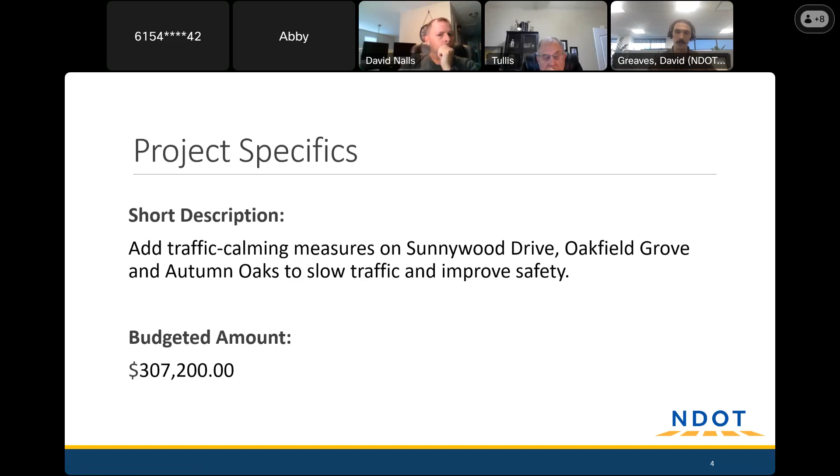Yeah, that is a good question. So basically what I'm aware of is what's available on the public end of the process - there's a short description and a longer description on the website. But I don't really have a lot of history on what decisions were made leading up to how those descriptions came through on the ballot.

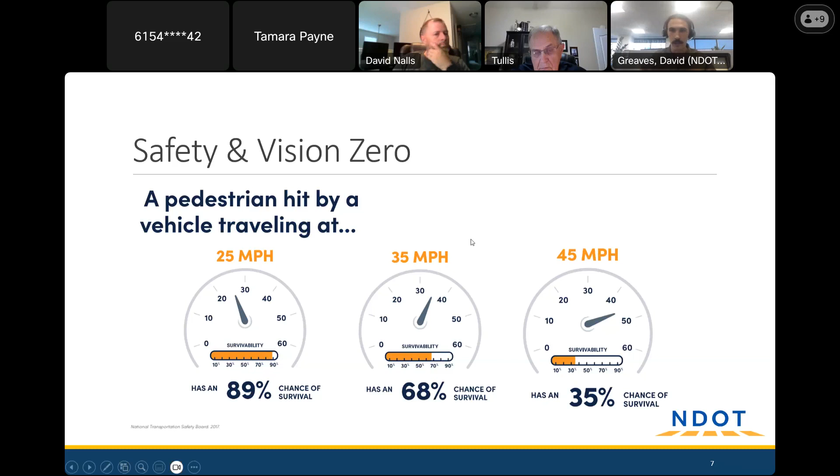So this graphic here demonstrates that at the 25-mile-an-hour range, where most of our neighborhood speed limits are, if somebody is struck, they've got a pretty good chance of making it out alive. But as those speeds climb to the 35 and even 45-mile-an-hour range, those accidents become much more serious and have a much higher probability of killing the person. So that's what we're seeing and why we're so concerned about speeding in neighborhoods.

As just a bit of background to traffic calming, I'm sure some of you are familiar with Hub Nashville. This is going to be a good resource to be aware of in case we come across anything y'all would like to request that can't be fit into a project like this. Some examples would be sidewalks, stop signs, debris in the road, potholes, that sort of thing. It's a good way to contact Metro for just about anything. That can be reached at 311, hub.nashville.gov, or they also have an app that makes it pretty easy to file requests and post photos and such.

So before we jump into specific designs, we're going to review all of the tools in Nashville's traffic calming toolkit. Some will work well for some streets and not well for others. We'll get into that when we present the concepts, but I'll just jump into some of the options we have on our plate.

The first one is speed cushions. These are modular rubber devices that act kind of like speed bumps, but they're stretched way out in the direction of travel so that they don't have quite as much impact as a speed bump might have. Speed bumps are really short, maybe a foot long, intended to encourage driving at 5 to 10 miles an hour. These are stretched way out to encourage driving between 20 and 25 miles an hour. There are different lengths for different scenarios and different levels of traffic — that's a design decision we'll make a little further down the road.

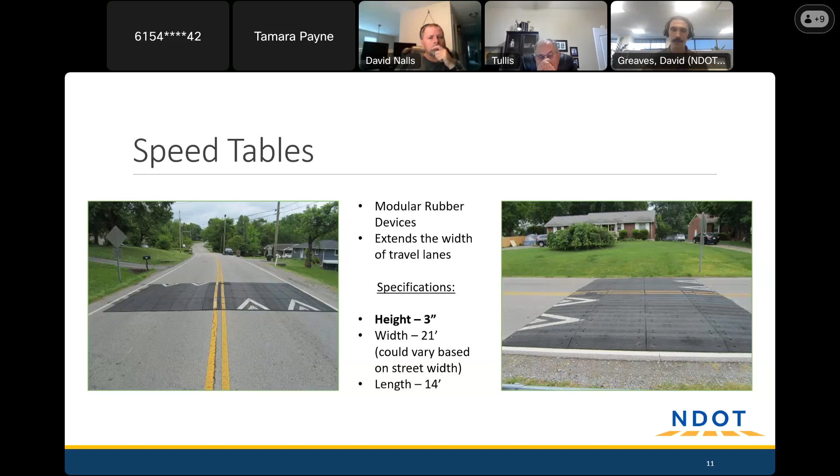They're distinct from speed tables, which stretch all the way across the road but are otherwise the same thing, because speed cushions have gaps in between them. Those gaps allow emergency vehicles with wider wheelbases to navigate these without having to slow down quite as much as a smaller vehicle, like a truck or a sedan, might. So that's the difference between the two. We tend not to use speed tables too much, particularly on roads where we'd expect emergency vehicles to need access to get to other parts of town, but we'll cover that if necessary. They can be good for odd road widths where we may not be able to get a solid speed cushion design in.

Those two combined, the vertical measures, are definitely NDOT's preferred method for slowing speeds. The reason for that is we know they're a good investment. NDOT has done a study of a few projects before and after installation and discovered that the speed reduction they were shooting for was achieved.

Where we can't do speed cushions or where maybe a little extra help is needed, we can think about radar feedback signs. It's basically a solar powered device that you pair with a speed limit sign to flash back the speed you're going as you approach it. It's got radar to show you that number, but it doesn't take any pictures or write any tickets. It's really just intended to be more of a reminder—if you weren't intending to speed, maybe seeing that you're going over the limit will slow you down.

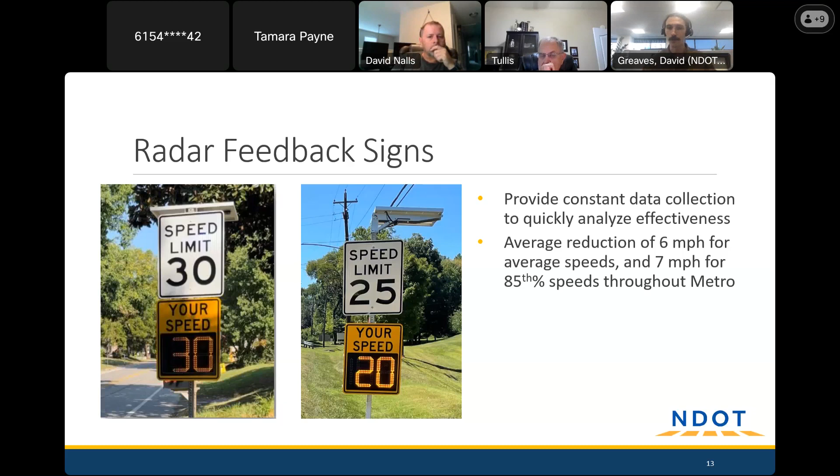On roads that are a little wider than they need to be, we sometimes find it effective to narrow the road with edge lines. This is intended to make the road a little more claustrophobic. We'll still give two solid lanes worth of pavement, but we don't want so much extra width that people feel comfortable going faster than they should. It's like driving on the interstate with very little traffic—it's wide open and easy to lay on the gas more. But in a cramped, tight environment, we drive much more slowly because of the additional maneuvering needed.

A side benefit is it can make it a little more comfortable to walk on the edge of the road if you're a pedestrian, because you've got a line you're staying on one side of, and you can expect vehicles for the most part to stay on the other side. It certainly doesn't mean don't watch out, but delineating that space can be an improvement for walkability.

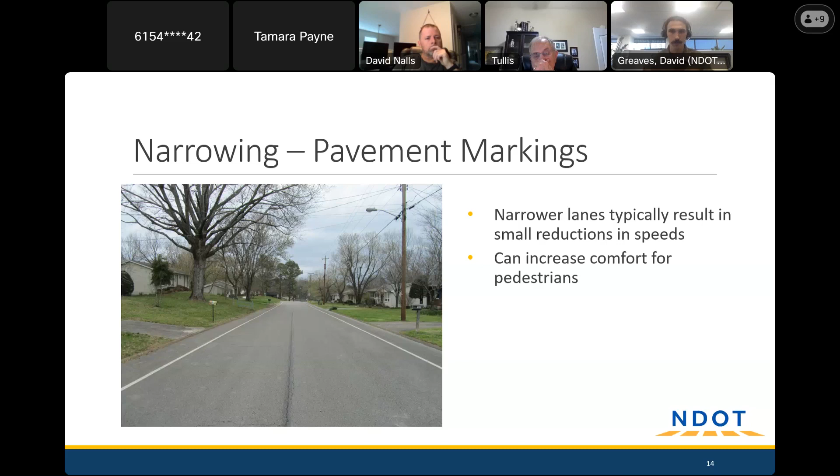On really large intersections, we narrow them from both sides. This works the same way as narrowing does, reducing the space we have to drive in to beget slower speeds, but they're a little more complicated. Essentially, we tighten the turning radius at those corners, making it necessary to slow down and make turns at a safe speed. If we had really wide radii, like you may see on an interstate ramp, it's a lot easier to take those turns going fast, which may not give you enough time to notice a pedestrian in the road or someone crossing the street. So we like to put these in at intersections with a lot of pavement width, particularly ones where folks may be walking around.

We can also do chicanes. This is where we take a wide road, narrow it down, but then zigzag the center line back and forth. This slows speeds by both narrowing and forcing drivers to maneuver as they go along a roadway. The main disadvantage is if you have a road with two sides of on-street parking, it basically takes it down to one side alternating. So in neighborhoods that rely on street parking, we tend to be hesitant to go for this option. But in neighborhoods where parking isn't going to be a big deal, it can be a good tool.

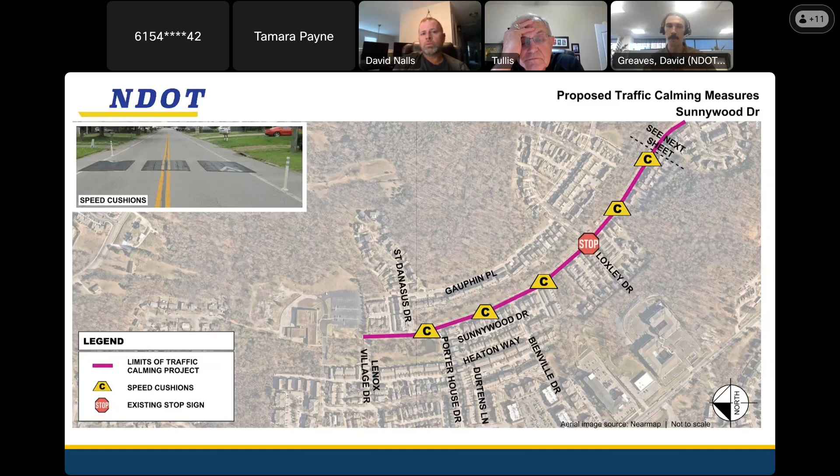Yeah, sure thing, that sounds great. I'll add a note about bulb-outs in particular, because we're going to talk about those with some other projects. Might I just add one point? Yeah, please. This is Jim Thompson.

Lot of people through there, which is really great. One disturbing thing to me is folks that come into that intersection, kind of slow down, particularly turning up Old Terrace. Lots of folks, it's a fast rolling turn, and I do worry about pedestrians, of which I'm one, with the traffic, kind of careless, sloppy driving. But there are lots of folks on foot. That's the point.

Got it. Well, yeah, that's good to know. So I guess I'll continue on to my note about the bulb outs. What these do, for the most part, is enforce existing parking laws. So if anyone isn't aware, nobody should be parking within 30 feet of a crosswalk. That's to make sure anyone using the crosswalk is visible before someone starts making a turn. So if we do put bulb outs in, no existing legal parking spaces will be impacted. But if people do tend to park at an unsafe distance to that crosswalk, this will help keep everything organized.

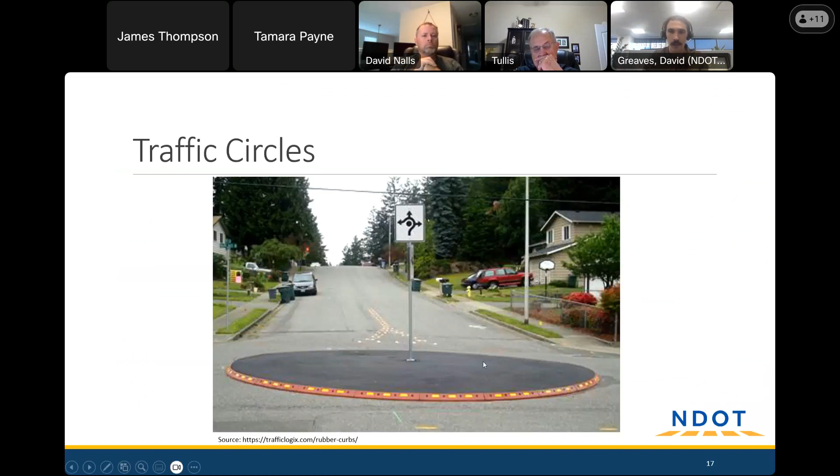So it sounds like we should take a look at that intersection in particular and see if there's anything we can do to improve the safety. Something like this might be helpful, but we're going to go out and do a site visit, collect a lot of data in person, and make sure everything we're seeing online in imagery is generally correct. That's great. Thank you. And thank you, Jim.

Any other thoughts on Sunnywood? We can come back, but we've also got two more streets.

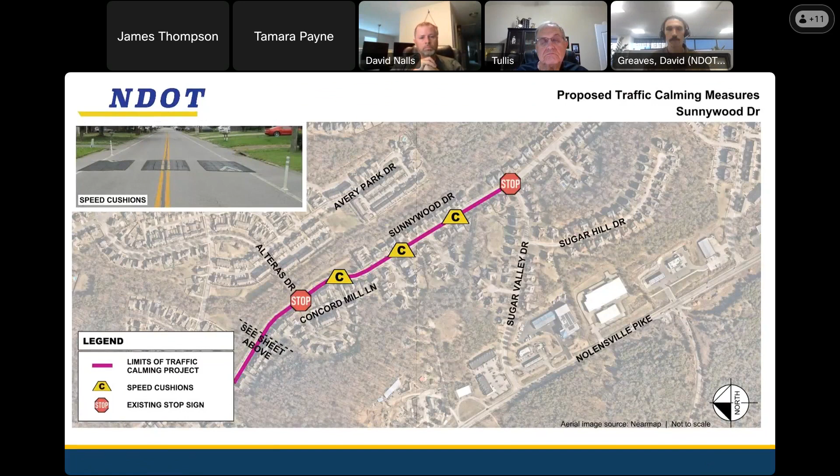Sure. All right, so on to Autumn Oaks. This one was a challenge to design because of grades. One thing I didn't mention with speed cushions is we do not put them on hills, because there is in one part a warranty that will go away if it's on a grade steeper than about 7%. It's also just kind of bad design practice to put these on curvy streets or anywhere visibility might be reduced. So I found the one flat section of Autumn Oaks, where this row of houses is shortly before Autumn Oaks Court. And then this intersection here, I noticed had a crosswalk that may not be as protected as we might want. So I noted some bulb outs here just to get us thinking, but I'd love to hear from you all if there's anything else you'd like to see.

Sure, to that crosswalk at Scarlet Ridge and Autumn Oaks Drive — a lot of times that crosswalk is unable to be utilized because of street parking as well. So we share a lot of the same street parking concerns, where people are parking on sidewalks. They've got enough cars in their driveway that it's blocking the sidewalks, as well as parking on crosswalks. And it's right there at the turn, so it's difficult to see around that vehicle if a dog comes out, if a kid runs out in front of the car, at that intersection of Scarlet Ridge and Autumn Oaks Drive.

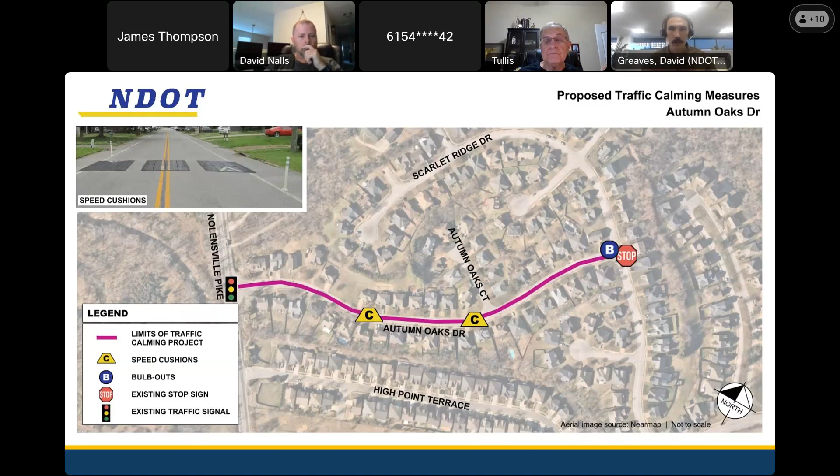So when will this be done? That's a great question. A typical traffic calming project tends to take a pretty long time, mainly because there are a lot of projects in the queue. So the estimate we normally give is 8 to 10 months from the time of design being done and going to construction, and then ultimately getting built. That isn't to say that's how long it takes to build it, so you won't be under construction for months at a time, but the queue is pretty long at the moment.

I will say it could be faster than that, because this is a participatory budget project. There may be a reason why it has to go a little sooner than a typical traffic calming project. But I can't say that for sure, I truly don't know if that'll be the case. But it'll either be getting to almost a year, or perhaps sooner than that if necessary.

So in circumstances like this one, where basically the traffic's already being funneled off of Nolensville Road through the neighborhood because of the road widening project, and basically nothing being done to prepare the community for this traffic, are there participating parties we can reach out to to try to expedite this, inside the community, since we now have a charter school we didn't have? We have 500 to 1,000 more cars a morning we didn't have because of the road widening project.

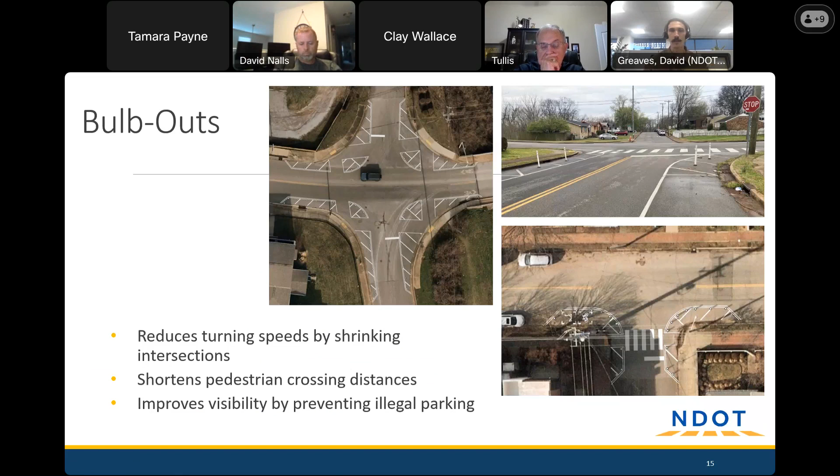The problem with Oakfield Grove is that the top of it, where it meets Autumn Crossing Way, becomes a racetrack. We've had literal drag racers come through, seeing how fast they can beat the car coming up to the two-way stop. We've sat in our driveway and had cars pass by so fast they're a literal blur on camera trying to record them. That's during normal times, like a Saturday afternoon. At 2:30 in the morning, I can be up with my youngest and they're still racing down Oakfield Grove.

My driveway butts up against Oakfield Way, so we're in a blind spot coming up from Indian Creek to where my driveway is. There have been multiple times I've been backing out of my driveway, checked it clear in all directions multiple times, and still almost been T-boned just trying to back out.

That's where, because people are just going excessively fast up through Oakfield Grove. They are flying, and it's not just everyday drivers, and it's not just kids. It is these modified vehicles that come through here sounding like gunshots most times, but it is the Chargers, the Challengers that think they own the road.

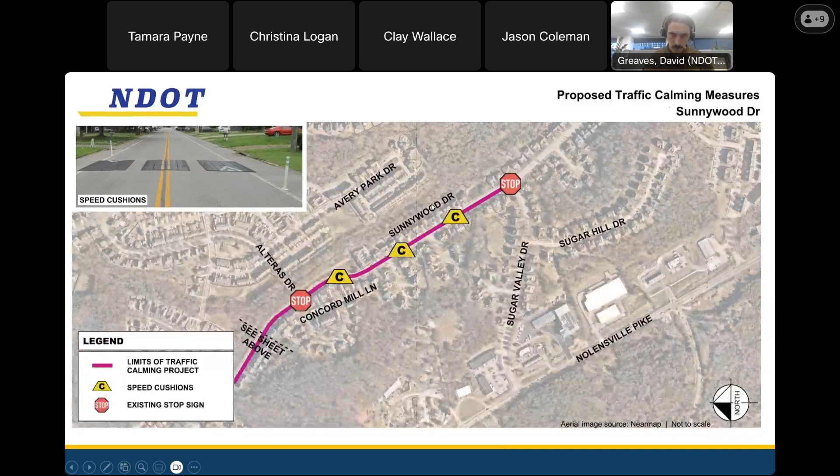Autumn View deals with the same thing, Christina. Yeah, because Autumn View has the cut through from Pettis. Everybody coming over from the outlet malls or wherever they're coming from takes Pettis down, cuts through Autumn View, cuts through our neighborhood, to be able to completely bypass Nolensville Road.

I don't think ours is necessarily a product of the construction or anything. It's just that they've opened up new neighborhoods connecting within each other, and that's the neighborhood's easiest connection. Exactly. I saw the biggest change when they made the connection to Indian Creek, and I've used it myself—I used to work that way, so it was helpful to me. But once that opened, that's when I really saw the biggest change.

I do think it's going to have to be more than just Oakfield Grove, because if you slow people down there, they're going to move to Autumn Crossing Way. People are already flying on that as well. So it will have to be kind of a larger scale, I think. I think so too.

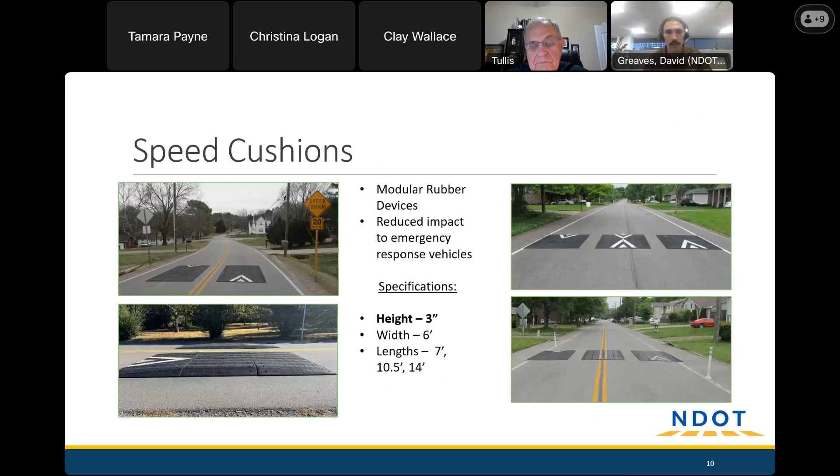Well, that's all really good to know. So I've heard a lot of feedback here, and I'll let you know my plan for next steps. It sounds like we need to do everything we can to see what vertical measures could be installed on Oakfield. It's not going to be like what we saw on Sunnywood—we just don't have as many opportunities here, but it's possible we can look at some of the constraints we're working around and come at it with the knowledge that the problem is very severe, as you've described, and weigh those two things. So I'm going to check in with our partners at NDOT and my colleagues, and take a close look at this street in particular, and if there are any vertical measures we can add, we'll seriously think about doing that. I also hear the point—

Sorry, quick question. The intersection at Autumn Crossing Way and Oakfield Grove—I think one of the issues we see as we travel back and forth through there regularly is that it's currently a two-way stop. And it's not 100% clear to people who aren't familiar with the neighborhood that it's a two-way stop, or you have people that know darn well it's a two-way stop and just blow through it.

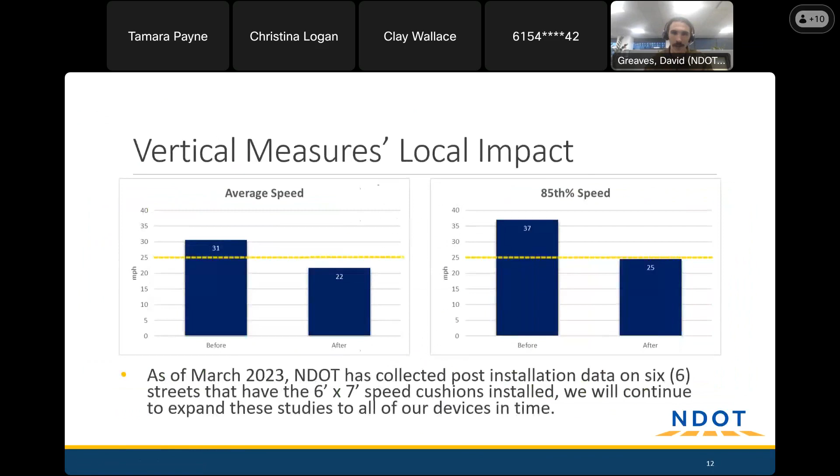Maybe not. What I'll do is ask and see if it's possible to lump this one in. If not, it'll still be eligible. It sounds like y'all are getting plenty of speeding and traffic, so if we went out and took measurements again, it would demonstrate needing to be on that list. I don't have a final answer right now, but it certainly sounds like a good idea. Yeah, I'm happy to help and meet with anyone we need to meet with, or provide any information.

We even have a security camera that sits right there. Yeah, we have a security camera we can put right on the corner of Tapaco and Oakfield Grove and capture all sorts of stuff. That sounds great, but I will say with or without security cameras, I believe you.

Sure, you needed some physical evidence to take to whoever needs to see it.

Now, I know you mentioned that speed humps or speed cushions can't be put on hills. So does that also eliminate putting any sort of traffic calming further into Indian Creek, like down by the park? Because that's kind of in a valley between two hills.

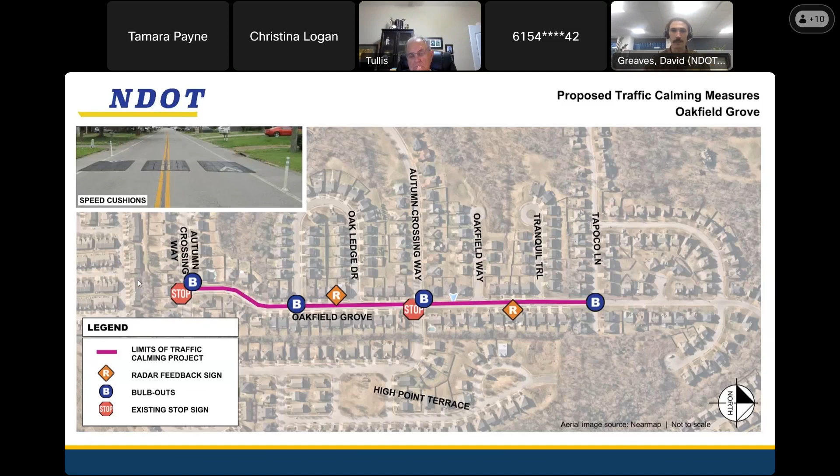But with that, do you have any other questions before we call it an evening?

The only thing I have is you made the comment about the hills prohibiting the measures. Is there a particular grade that becomes an issue? Because we've got three major points of entry off of Nolensville into our neighborhood that are pretty decent grade, and I want to make sure that we don't expend a lot of time trying to explore measures on those streets, wasting your time and or ours.

Sure, and I'm particularly referencing Lord's Chapel, Lenox Village Drive, Porterhouse, and Bienville. Do you know if the grade is suitable on any of those four entry points that we would be available for traffic measures? Yeah, so I haven't checked any of those to know, but I'll tell you the grade that we generally work with is 7% as kind of the hard cutoff.

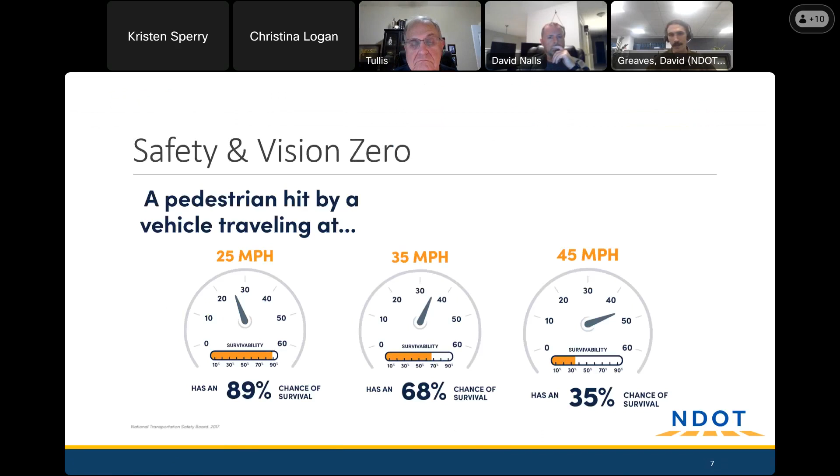That would help a lot, specifically around the stop signs and calling out crosswalks, things like that. Sure, yeah, I've got that noted. We'll keep an eye on it, or basically when we're on site, just check it out. It sounds like we should consider doing that as well. I'll say all these three streets combined do kind of have that maximum budget that's been allocated, so we'll need to keep an eye on that. But with that amount, I'm not seeing any major constraints that we'll need to be super tight on. So I'll just leave it with that. Same answer to all the other questions: maybe.

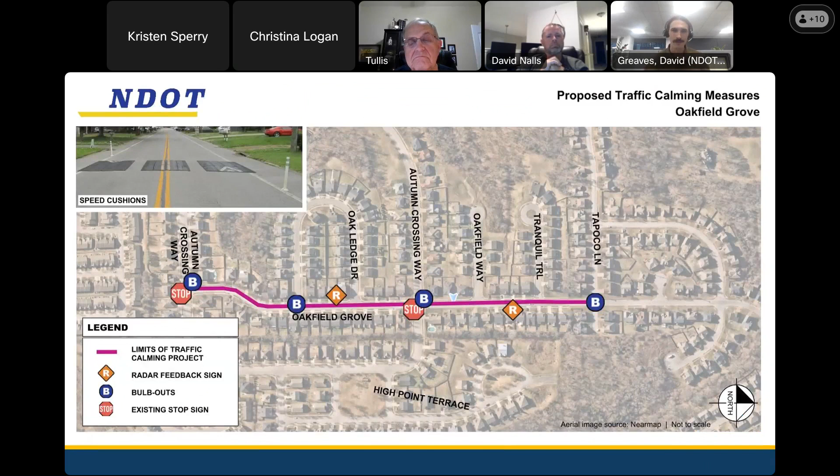Anything else? I have one quick thing, if I might. Sure. Yeah, this is John Rutherford. In Lenox Village, where the speed limit was lowered in neighborhoods in general to 25, there's a couple of signs in Lenox that still say 30, and also in Lenox and surrounding areas there's a couple of spots where...

...the painted speed limit on the roadway says 30, where the signs say 25. I wasn't sure if that was on your radar or not. It is now. That's good to know.

Yeah, I know that has been something that's happened sort of all over Davidson County. We were glad to be able to lower the speed limit to a safer speed, but it sounds like there were some details that needed maybe some more attention.

Was that for all neighborhoods or just specific ones that have requested traffic calming? No, personally that was for all neighborhoods. I was personally involved. That was all neighborhoods in the GSD because I sponsored the legislation at council. We had previously done it in the USD, so I carried it to do it in the GSD.